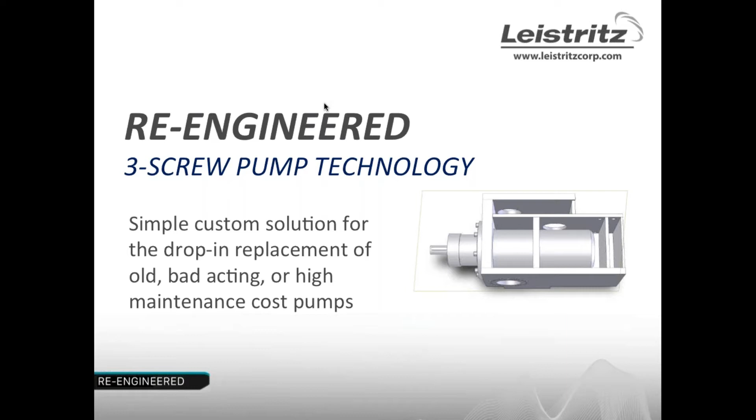What we'll go over today in the next 20 minutes or so is a brief history of Leistritz, then move on to why should a pump be replaced in a plant. What are some of the common issues and problems that need to be solved? What are some of the obstacles to performing this pump replacement? Then we'll talk about the Leistritz re-engineered solution, a little bit about the custom design of our re-engineered pump, and then go into a few case studies. I'll wrap it up with information on how to request a quote from us, and then hand it back to Kim to talk a little bit about our service and support.

Leistritz has a long history of over 100 years serving its industrial customers, beginning with its founding by Paul Leistritz in Nuremberg, Germany in 1905. They began with the manufacturing of steam turbine blades, followed by the development of screw pumps in 1924 and polymer extrusion machines in 1937. 1973 marked the first presence in the US with a small customer service organization. Then Leistritz Corporation, a full US subsidiary of the German parent Leistritz AG, was formed in 1986.

We recently were reorganized into Leistritz Advanced Technologies Corporation, also known as LATC. The LATC Pump Division is headquartered in Allendale, New Jersey, located in the northern part of the state, and our facility handles sales, engineering, and project management for the Americas. We also feature a full service shop and warehousing for stock pumps and spare parts.

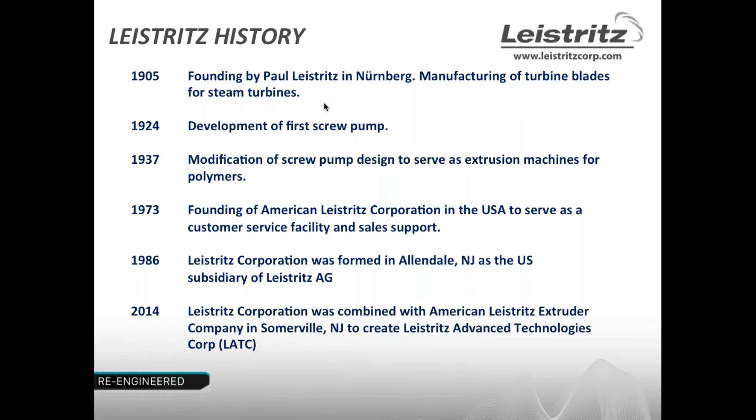LATC actually currently consists of 4 divisions: screw pumps, machine tools, turbine blades, and extruders.

Now we'll jump into the re-engineered concept and some of the baseline common issues and problems that plants can see that may warrant the replacement of a pump. First, when we speak about pump replacements, there are a number of baseline issues that we encounter. What I'm going to do now is review 5 of the primary examples.

Okay, so in addition to the aging of pumps, another problem we come across quite often are inefficiencies in the existing pumps due to changes.

Existing pumps that were selected based on decades-old process data, and in many situations, operating conditions have changed over the years. Possibly the product being pumped has changed, or there are different pressure and temperature conditions. Often viscosity may also be changed from 40 years ago to now, as the products that come in may be quite different.

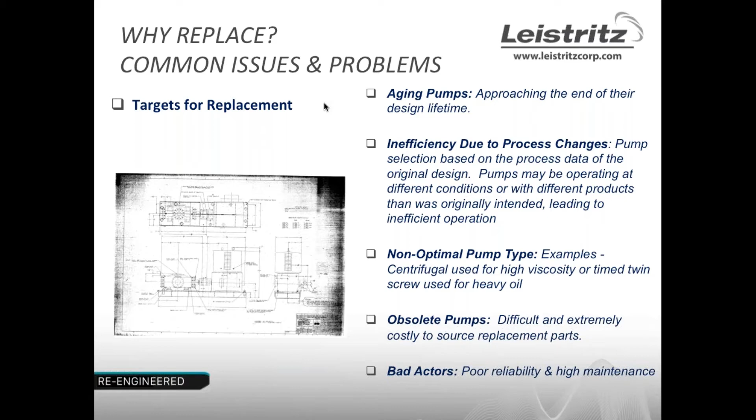So although there are many good reasons, as we just saw, for replacing a pump, there are also obstacles that a plant faces that may require site modifications and associated costs for a typical replacement.

Speaking about a few of these obstacles that a plant might encounter, first would be the existing piping. If someone was going to get a standard replacement pump, it would likely have different flange locations than the existing obsolete pump, for example, and that would require piping modifications in the plant.

Existing piping might be old, might be insulated with material such as asbestos, and modifications potentially can require hazardous cleanup and permitted hot work, which is difficult to get approved and expensive to carry out.

Another obstacle is the existing infrastructure and foundations. Concrete foundations that are at a plant may be grouted or otherwise difficult and costly to remove, and to reconstruct them would be challenging.

Also, possibly there are obstructions or auxiliary piping, electrical conduits or steam piping in the area, and that may also make any kind of construction in the area difficult and challenging.

And finally, an obstacle that plants always encounter would be just the replacement pump cost. Would it be more costly to put in a new pump and make all these changes to the site, rather than just keep their old pump in place and struggle with the high maintenance costs?

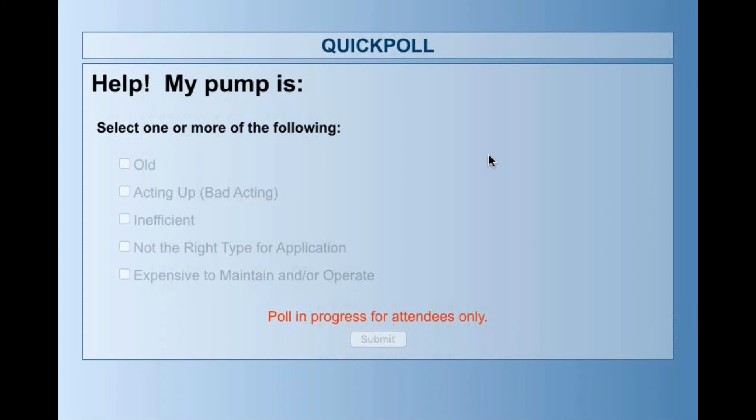So most of you have gone ahead and answered, and 100% of you said it is just simply old, as well as a series of acting up and not the right type for the application. So there's a combination, but everybody has said the best reason for dropping in a new pump is because it's just outlived its usefulness. Great, thank you for doing that.

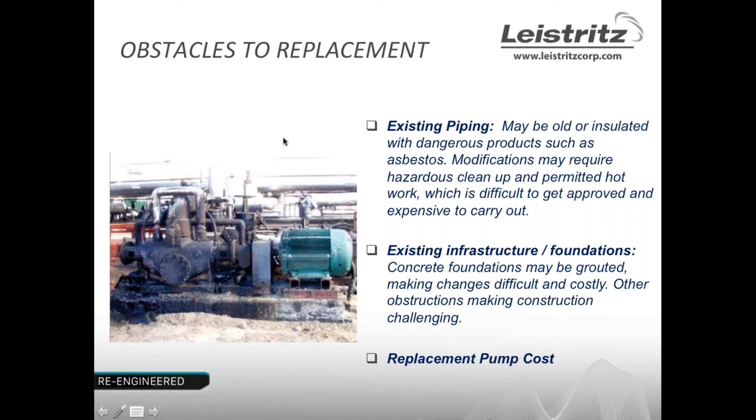So what I'm going to jump into now, we just talked about the problems that may exist at a site that would justify a replacement pump, and we talked about some of the obstacles that are in the way. So now the Leistritz solution in overcoming the obstacles to pump replacement is our reengineered concept.

Based on drawings and measurements of the existing installation, we can custom fabricate a pump casing that matches the existing flange locations, regardless of their orientation. So whether you have a side in, side out, side in, top out, axial in, whatever it is, we can match those existing flange locations. We also can match the existing shaft height.

In the case that a driver should be reused, if that's possible, that can be done as well. This will eliminate the need for site modifications of the existing piping or foundation, enabling essentially a drop-in replacement to your old pump. In addition, other complexities such as heating jackets, if that's on your existing pump, can be incorporated into our casing design.

In addition, the re-engineered pump utilizes a standard removable pump cartridge of the 3-screw design that contains all of the rotating elements and features that would be required for a specific application. As you can see from this drawing here, the cartridge simply slides into the casing, and it allows for very easy future maintenance or replacement. Often the customers will stock a spare cartridge, so it could be quickly changed out if necessary.

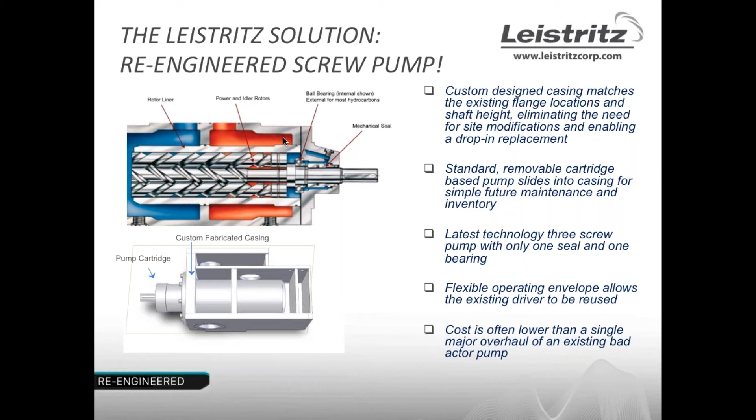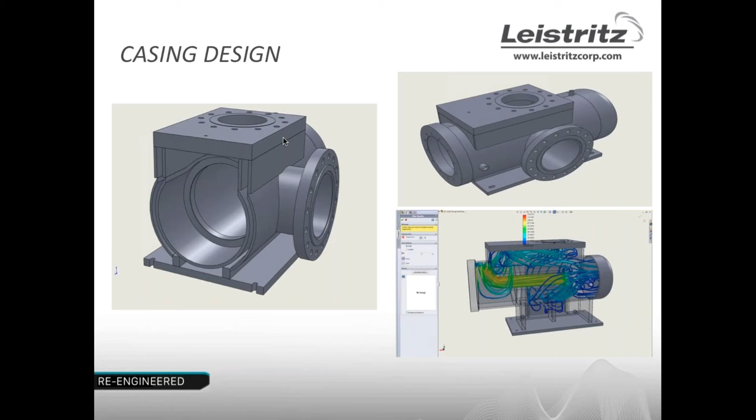Here you can see on this slide about our casing design, and using dimensional data from existing pump drawings, often together with site measurements, we can precisely design the replacement casing using 3D modeling. Where it's necessary, we even can use computational fluid dynamics to model flow and velocities through the pump chambers to ensure that everything is flowing properly and everything meets specifications and requirements.

Okay, so once a completed pump design is finalized, we come up with an approval drawing. It's sent to the end user for verification and approval. And once approved, it proceeds immediately to manufacture. Our custom casings are manufactured in the USA.

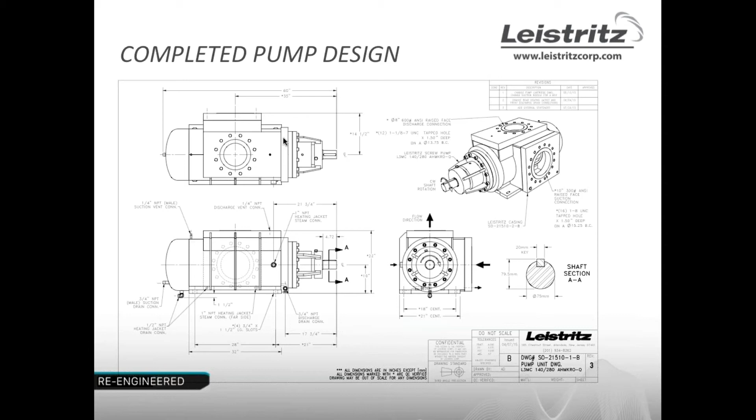Okay, so finally, here I'll show a picture of what our cartridge-based pump system actually looks like. You can see on the right-hand side the custom steel casing, which matches the existing pump on site. And on the left is our pump cartridge, which just slides directly into the casing for easy removal.

All right, so we'll jump into just a few case studies so you can get some example ideas of real-world applications here. The first example here of our re-engineered 3-screw pump is the replacement of a Warren timed twin screw pump pictured on the left. In this case, it was approaching the end of its design life, so it had poor reliability and was incurring very high maintenance costs. Our re-engineered drop-in replacement shown on the right matched the side and top discharge, and the plant saved significant money by eliminating their bad acting pump.

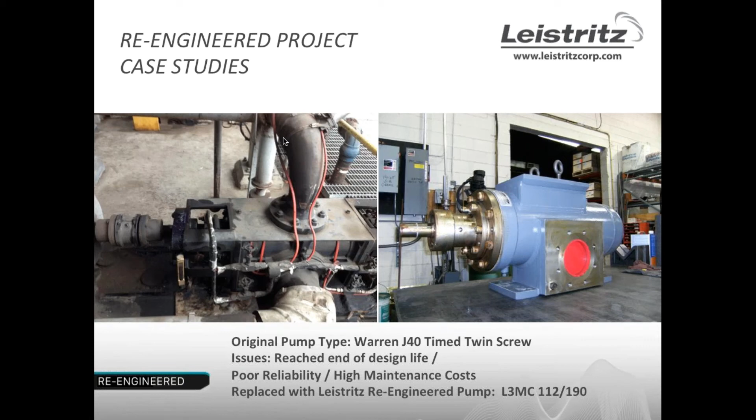The next example is a re-engineered 3-screw pump that replaced an obsolete IMO C324 pump. As an obsolete pump, parts were difficult and costly to obtain, and our customer was not happy with the IMO's non-cartridge type design, which made maintenance very labor intensive. They're very happy to have the cartridge-based design, which just slides in and they can keep a spare on the shelf.

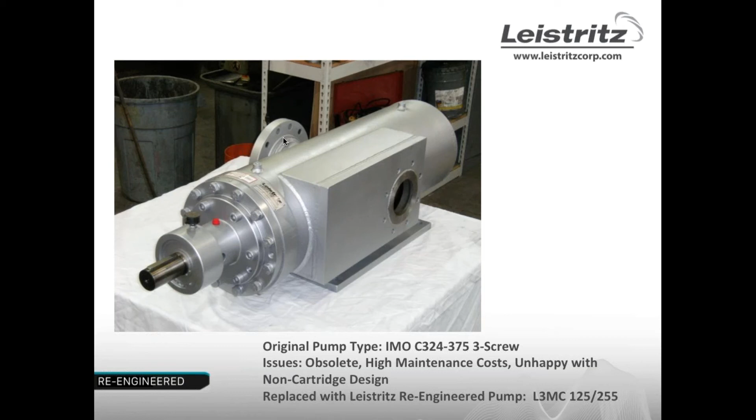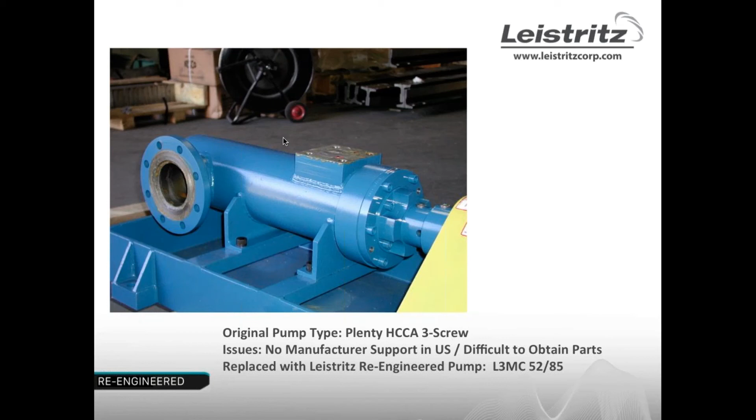The final example I have here is a drop-in replacement for a Plenty 3-screw pump. In this case, there was no manufacturer support in the US market, so operational information was not available and parts were difficult and costly to source. The plant switch to Leistritz gave them access to convenient US-based support and spare parts.

So that's a quick summary of the re-engineered concept and some real-world applications.

If you are interested in receiving a quote from LATC, we would just need some basic information to get started. These would require the flow rate needed for your application, the suction pressure, discharge pressure, the fluid type, temperature, and viscosity. If we're going to be reusing an existing motor, we'd need to know the operating speed of that motor. And for the re-engineered custom casing, we would need some existing drawings and possibly perform a site visit to take some measurements.

With all that information, we could simply put together a quote for you, and you'd be able to see how that cost would compare to maintaining an existing pump.

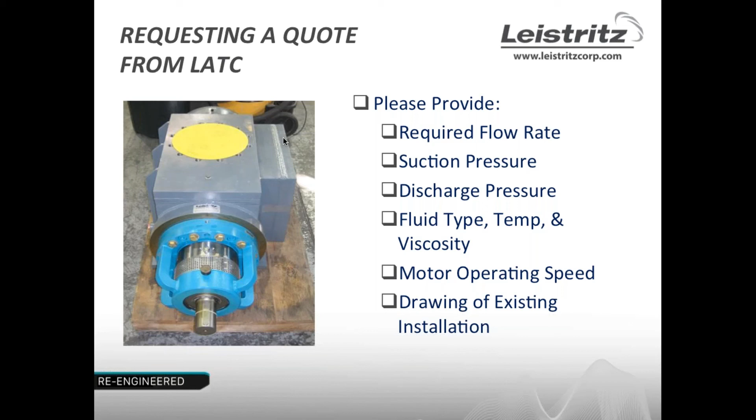And with that, I'm going to hand it back over to Kim to speak a little bit about our service.

Okay, thank you, David. Lots of great information. Hopefully everybody is thinking about some of their old pumps and what might have to be done in order to bring your facility up to speed, so to speak.

So I'd like to spend a moment going through our available service and support. We're very active in working with our customers after the sale and installation of any of our products. To best serve you, we make sure that we have original Leistritz parts in stock, so replacement or spare parts are just a phone call away.

Once a pump is purchased, we can help with startup commissioning and then work with your team to train on both operations and maintenance. Just a note, pumps should be inspected every 2 years to keep it in top working condition, and this is the service that we offer.

And lastly, if something were to happen to your pump, we are available for both on-site and in-house repairs. And also, of course, we are not traveling all that much right now, so we can also do virtual sales calls.